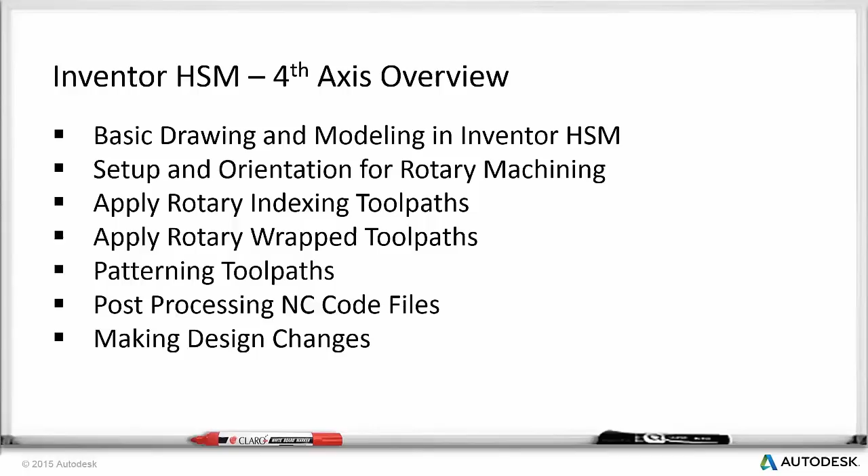We're going to show you how to pattern those toolpaths around the part, post-process, and get some code out so I can show you how it's rotating around the part. And then we're going to make a design change and see how it's completely integrated inside of our CAD and our CAM. We're going to walk through that easy-to-use interface.

This is the part we're going to look at. It's a torsion adapter for a vacuum cleaner, and we'll draw it up from scratch. Then we're going to put some toolpaths on it: put some rotary axis, put some drills on there, and then do some of the new wrap toolpaths.

So let's get started. We're starting from scratch today, so I'm going to walk through. I want to create a brand new project to start working with. This is the Inventor project that I usually work with when we do a lot of our demos and training. I'm going to go in and create a brand new project from scratch.

I'm going to go to Projects, New. It's a single user project, but if you have other users that you're working with, you can make a Vault project as well using our Vault. So I'm going to give it a project name. We're going to call it our 4-axis rotary.

And then I'm going to point to a folder on my computer where I want data to go and stay in that folder. On my desktop, I created one called 4th axis rotary. We'll open that up, and that's where it's going to save the parts. Okay, I'm going to go to Finish. Now I have a new project to work on.

I'm done. And now in my new project, I have no files yet, so we're going to start from scratch, a brand new file. So I'm going to go to New. We're going to start a new standard part and create it.

And so I like to work on the plane that's normal to the Z. So I'm going to start my rotary part going around the x-axis. That's going to be my a-axis rotation. So I'm going to draw in the XY plane today.

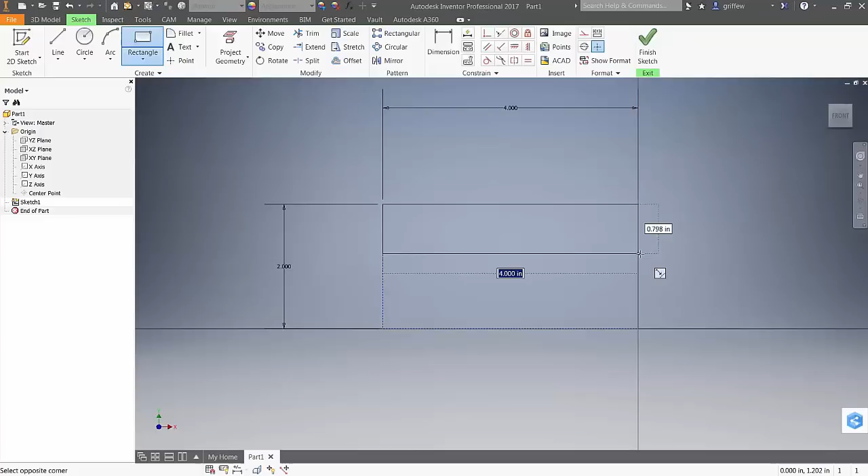So I'm going to choose another rectangle. I'm going to start in this corner where it snaps and it turns green, and I'm going to have it snap. If I hover over that line, you notice the constraint - it recognizes when that line is connecting to the dotted line or the construction line. So all I have to do is now define the thickness of the wall of my tube, because I'm going to rotate this around the X. So I'm going to choose a dimension, and I want this to be 3/8.

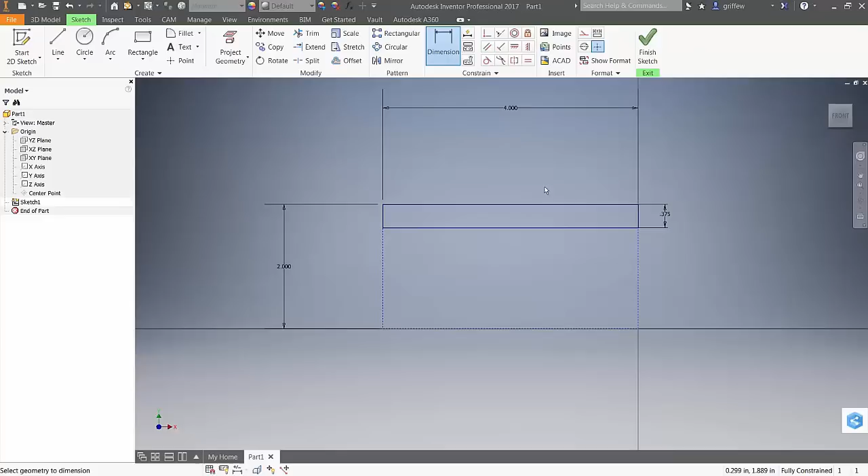So now I'm set up to rotate this part or wrap it around the X and have it as a revolve. So I'm going to finish that sketch. Now I want to revolve that profile, so I'm going to go up to Revolve. It recognizes the profile. All I have to do is select the axis of rotation. So now I have a revolved part.

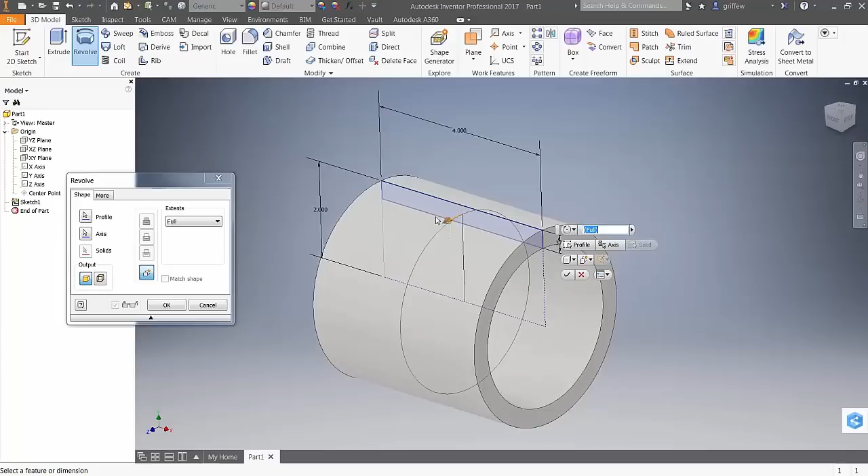It's a tube that I'm looking for, the shape of the design, and it's also around that x-axis. So I'm designing the part so that it is going to work when I go to bring it in and be able to revolve it around that axis. So inherent in my design, I'm setting it up so it'll work well when I go to do my toolpaths and I go to work on it in CAM.

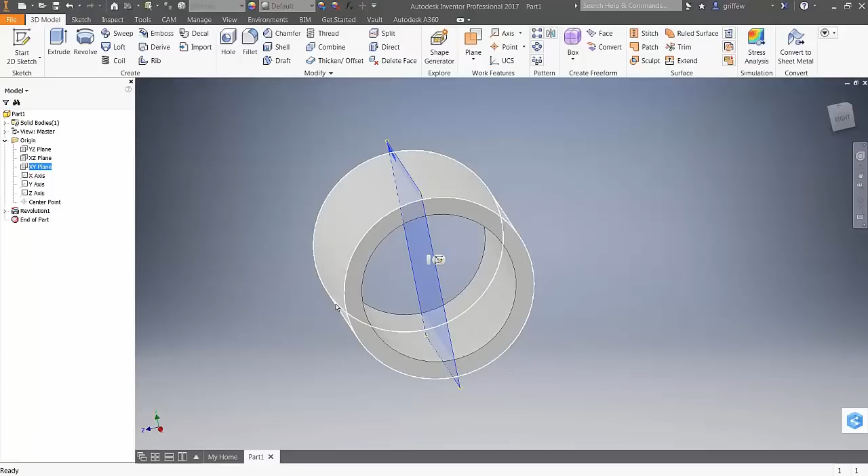Okay, so I'm going to have some features on here. This is the front of the part, and later on I'm going to consider it the top. So I want some features on that front plane, which is my XY plane. But I also want to put features where it intersects with the front and back of the part. So I'm going to add some offset planes. I'm going to go to plane, offset. I'm going to offset from this plane 2 inches, and offset a plane in the front that I can put some features on.

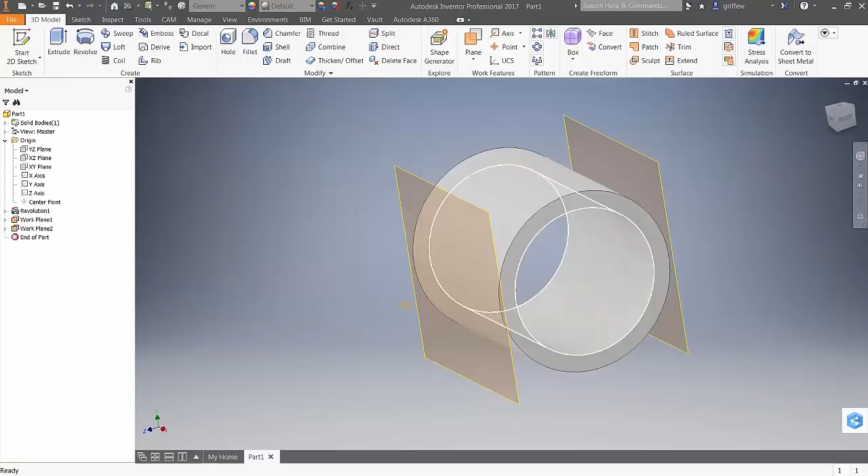I'm going to do the same thing. I'm going to select that same plane, offset from that plane, and go -2 inches. So now I have some planes that I can work 2D geometry on, which I can now project, or I'm going to emboss them, if you will, and engrave them onto the side of the part. So we don't need to see them right now. I can always select them later. So I'm going to highlight them while holding Control, right-click, and hit Visibility. Now I can hide them so they don't get in the way of what I'm working on.

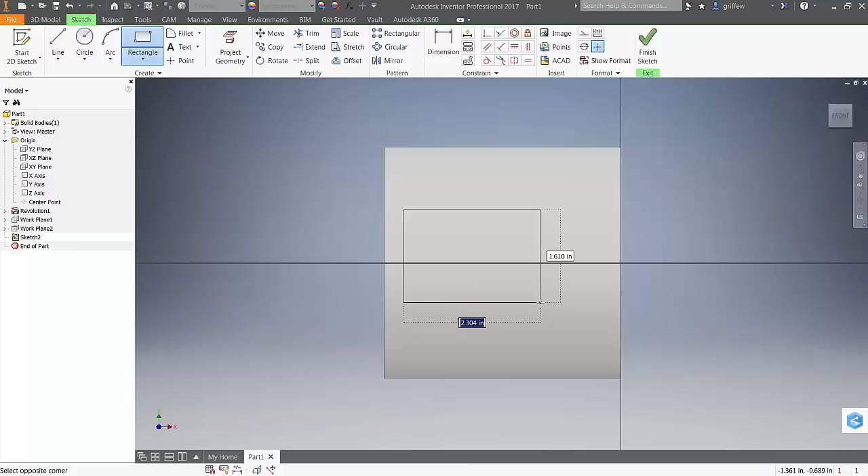All right, so I am going to do a sketch on that front plane, so I'm just going to simply select the work plane and then select New Sketch. I'm going to go into the front plane here, and I'm going to just simply put a rectangle in here. I'm going to start it from scratch. I'm not even going to put any dimensions - you can add dimensions here, I just want to show you can do this. If I just put a rectangle in space here, I can move it and stretch it, and add other constraints onto that rectangle.

Right, so I'm going to add some fillets around here. Let's go and add some fillets. Right in the corner, I'm going to say we'll put a 1/4 inch fillet in that corner. So if I hover over the corner, I get a preview of what that fillet will look like. All I have to do is click the corner, and I get those fillets on there.

Okay, so now I'm going to add some dimensions after the fact. I want this to be 2 inches. And I want this to be the width. I'll make this 2.5 inches.

And what I didn't do is I didn't project my point in here, so I could do that right now. I'm going to go to the center point, project it in, and now I can measure from that center point. The reason I'm doing this, I can also project any of this profile geometry, but often when I work, I like to add features that I can turn off and on later when I'm doing CAM or other operations. If you add a profile, or project those features in, they're now linked, so if you turn off something in the past, it'll turn off another feature in the future that depends upon it. So I like to work independently.

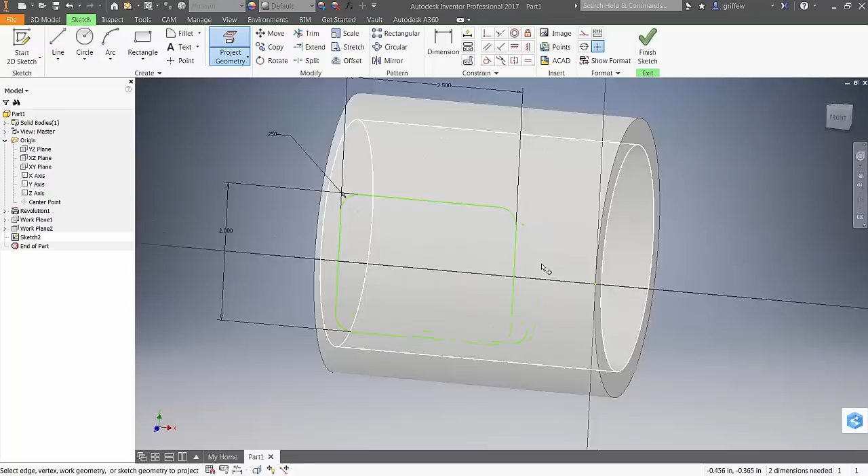So I want this dimension to be from the center point or the origin. I'm going to put another dimension from this origin to that line there, and make that 1.25 inches, or 1 inch and 1/8. Let's make it 1 1/4 inches. Okay, so now we're constrained, except now I have a dimension, or shall I say I can move this thing up and down in this plane.

Now what I want to do is add a construction line down the center, and I'll show you we can add some symmetry. I'll make that 4 inches. Now I want that to be symmetric about the center line. I already added that center line, so I'm going to make that become construction geometry, and now I want to add symmetry.

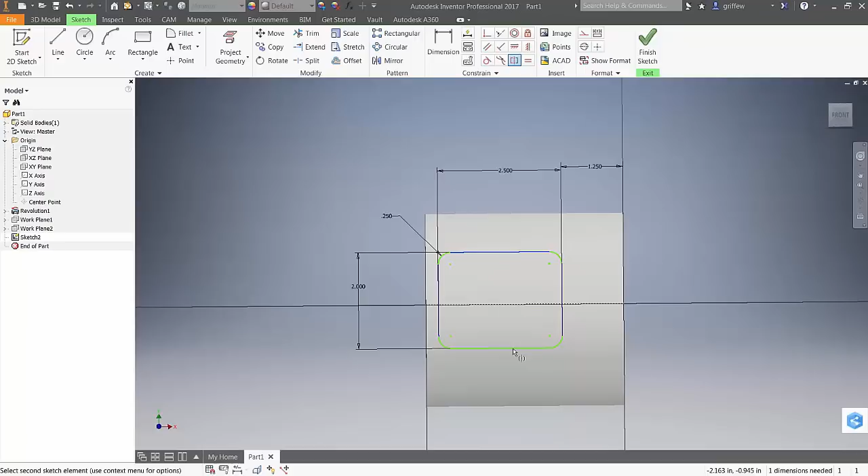So I click symmetry, and down here in the corner it says select the first sketch element. We'll choose the top line there. Then it says select the second element. Now it says select the symmetry line, which is that center line. And now I have a symmetric constraint.

So as I change this, I'll make it 1 inch. You'll see it'll stretch from the center out. So that's a way to add constraints as you're working on your design.

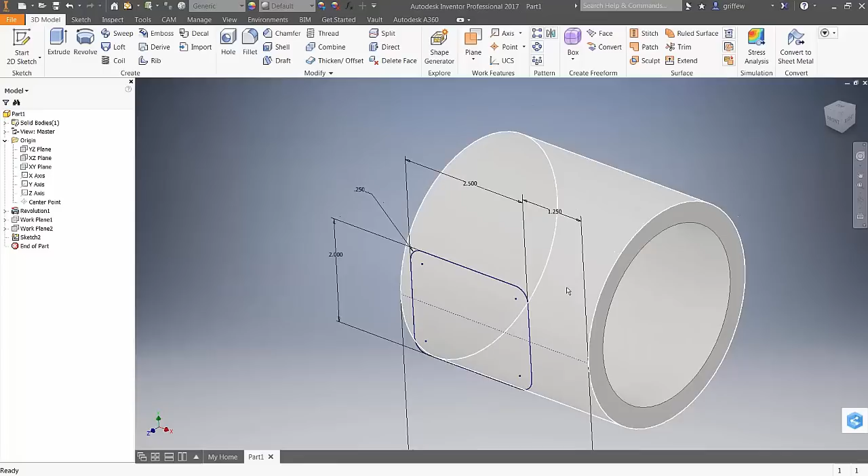Okay, so now I want to get this projected, not as a cut through. I don't want to cut it through. I want it to wrap into the cylinder, cut through as a wrap around the cylinder. Now, there's no direct project for wrap, but what I do is this: I go to Emboss. This is the Emboss tool.

You can use this to engrave too. It can be text in different shapes and different types of geometry. In this case, it's just this box, this pocket, so I chose to engrave it. I can give it a depth, and I know my wall thickness is 3/8, so I'm going to go 0.375, and I can tell it right here, wrap to face.

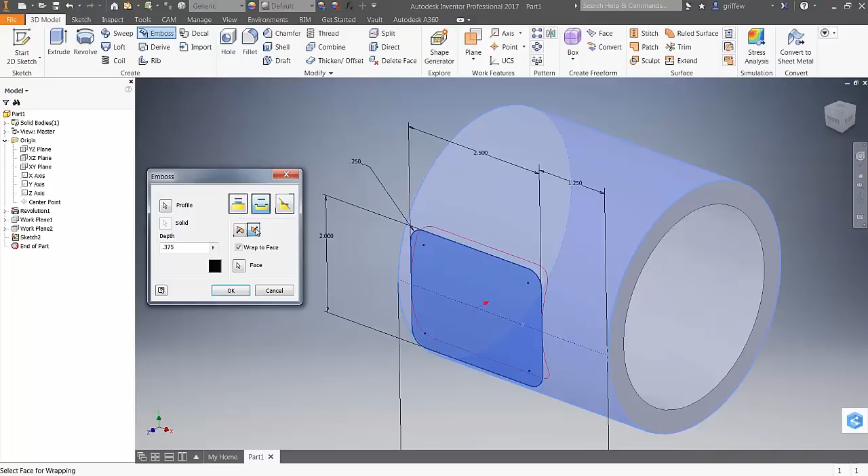So now we can wrap that geometry right to that face. It projected through because it's looking at the direction I want that to wrap, the direction to cut through. I simply flip the direction, and now I'm cutting it and wrapping it through the part as if I'm going to engrave it. Say OK, and now we have a pocket through the part that's wrapped around that cylinder.

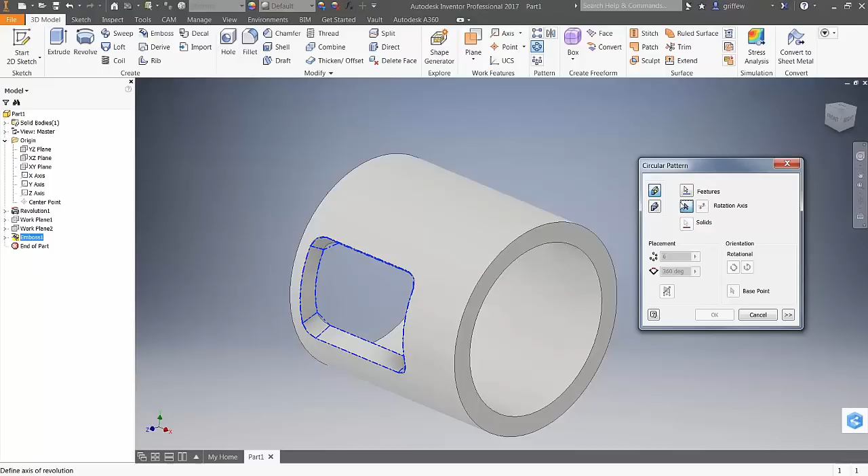So now I'd like to have 5 of those go around the cylinder, so I'm going to highlight the emboss feature I just created, go up here and select circular pattern, and bring it over. So I'm going to do a circular pattern around. It wants to know my center rotation axis, so I can just simply select one of these cylinders, the central one, and I want to make 5 of them. So now I'm going to wrap 5 of those pockets around the part. I'll say OK, and now I have those pockets wrapped around.

Okay, so now I want to add some hole features on the back side, because the front side is the center of the pocket. The back side is going to be this rim right here, and I'm going to put some hole features on there. So I'm going to flip it around, my Z is going the other way, and I'm going to use this work plane 2 that I created to put some holes here. So I'm going to edit on that work plane sketch.

I'm just going to put a line across here, and I want to put some points going across that line. So I'm going to create a line. I forgot to project my center point. There we go, I'm going to create a line, and we'll make that 4 too.

Now I want to be able to have that line, a point on this line. It doesn't matter if this is construction or not. I'm just going to put a point in that line in space. Okay, now if I drag that line or that point, it stays along that line.

Now I'm going to add a dimension to it, because I'm going to make a pattern of 5 of these. There we go, I made it an 1/8 of an inch, or an inch and a 1/4 inch. And now I'm going to add a pattern of 5 of those points, and those are going to be the center points for my holes.

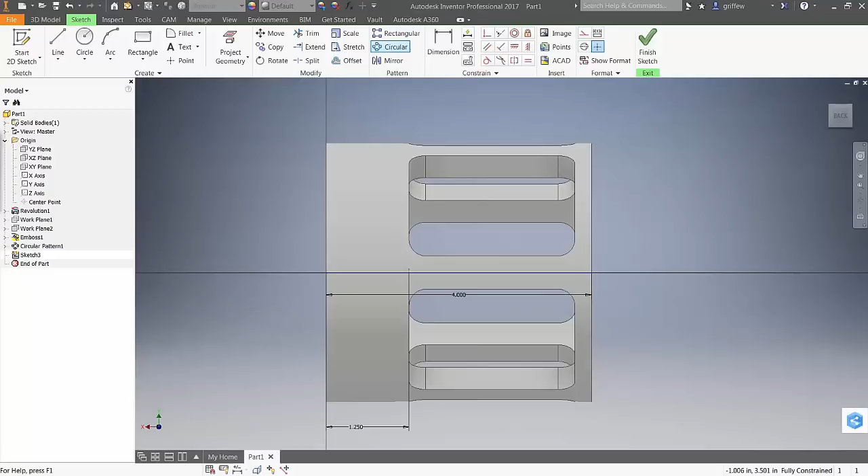So I'm going to go up to do pattern. That's circular, I'm going to change this to a rectangular pattern. I'm going to select that point, choose the direction I want it to go, select this direction, and I want to make 5 of them. So I select 5 and then give it a distance. I'm going to say 5/8 — you can even use fractions in here, and it works out nicely.

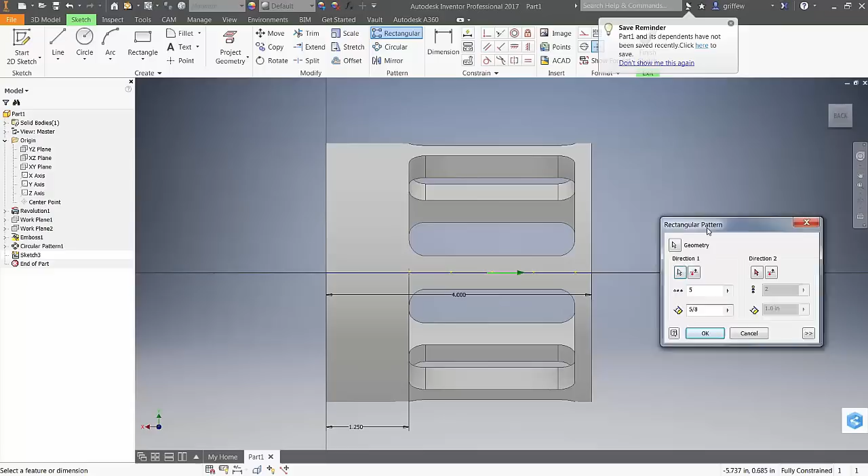So now I have 5 holes. I'm going to select OK — at least 5 positions for those holes where I want them to go. Finish that sketch. Now I'm going to highlight the sketch, go up to add a hole, and it recognizes those points on the sketch as places where I want to put holes.

These are 1/4 inch, I don't have to change that. I want them to be 1/4 inch holes, but I don't want them to go all the way through — I want them to be 1/4 inch deep. Now you can add threads, you can add a tapped hole, you can add other features to it. It's going to put the drill point in, but these holes don't have any taps, so I'm going to leave them the way they are.

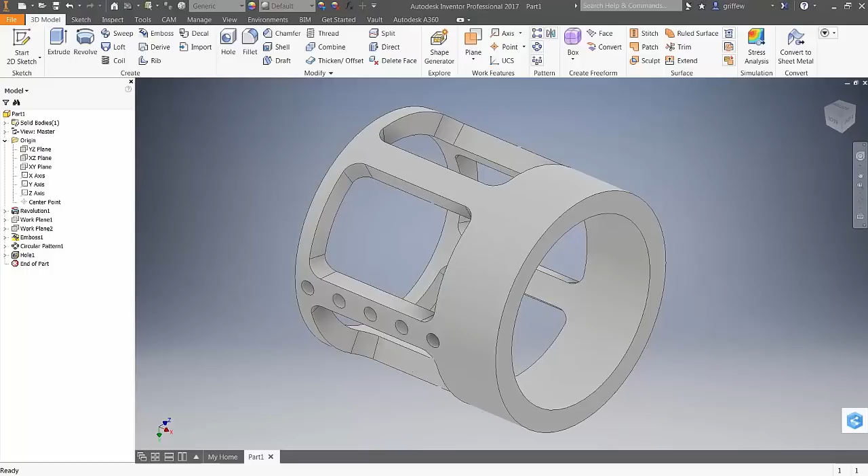And now I have a set of holes. So all I did was create a sketch on that plane that's adjacent to the face of the part, and I added points and just selected hole. Again, I can pattern those around. So if I select the hole, go up to circular pattern, it wants to know what's the center of my axis of revolution. I'm going to choose 5, and now I have those holes in that plane, each of those planes. So later on, we're going to index around to drill those holes.

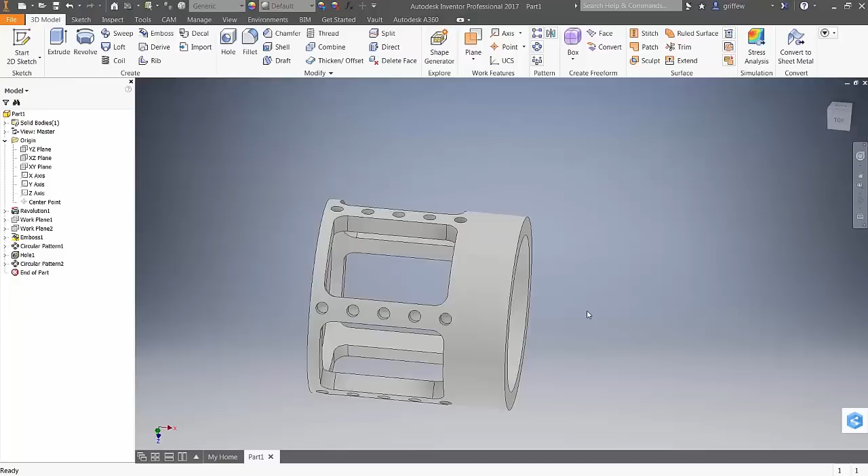I have one more feature, these little fingers, or these slots that are in here. So I'm going to select my work plane — we can work off my work plane too — and I'm going to create a sketch on that work plane too, and create a slot right here. I'm going to go in and project in my center point, create a slot.

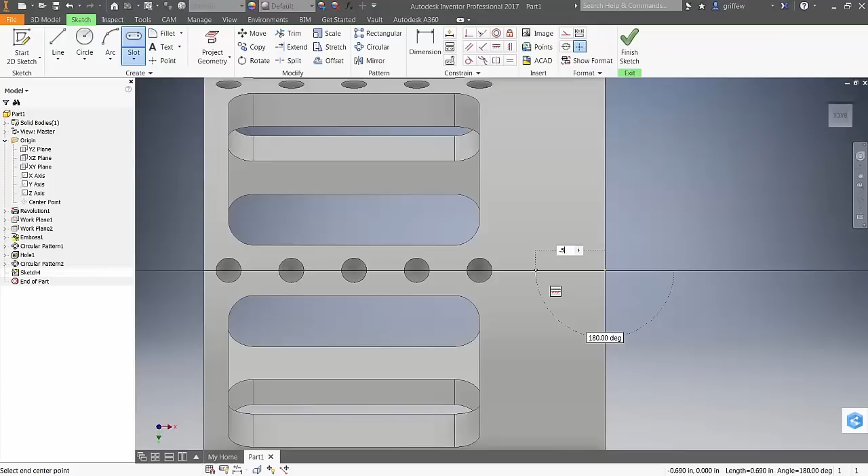And it's okay, I'm going to make it a 1/2 inch slot, and my diameter is going to be — my slot hole is going to be a 1/2 inch. It's okay if it hangs off because it's going to be an open slot. This is one quick way to be able to get that feature.

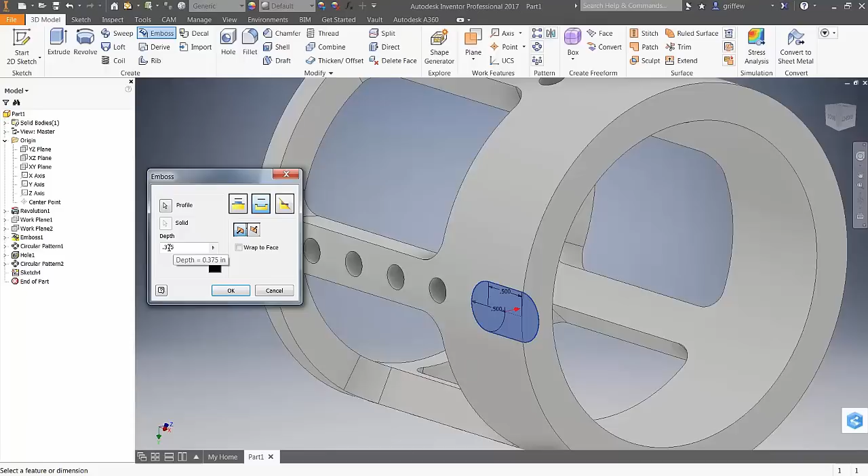Again, the same way we did it before, I'm going to emboss it. We want to do the engrave. If you remember the last depth that we used, if I change the projection, it'll project to the other side. I want to wrap it to this face and then say OK. And now I have that wrapped slot feature.

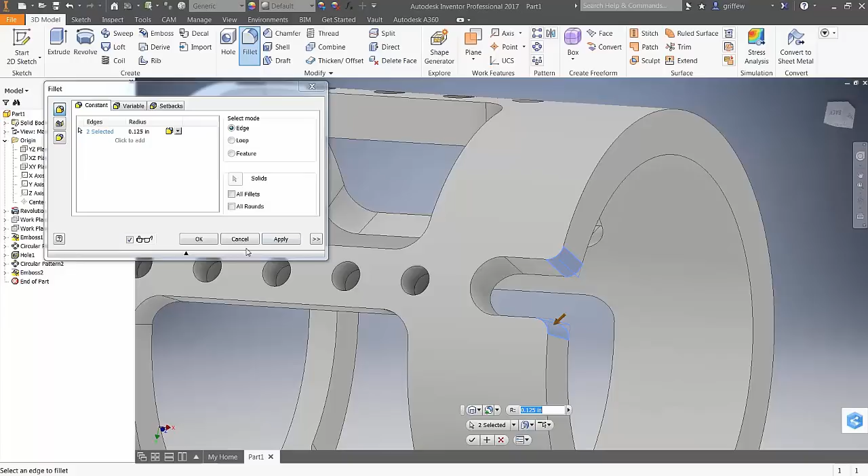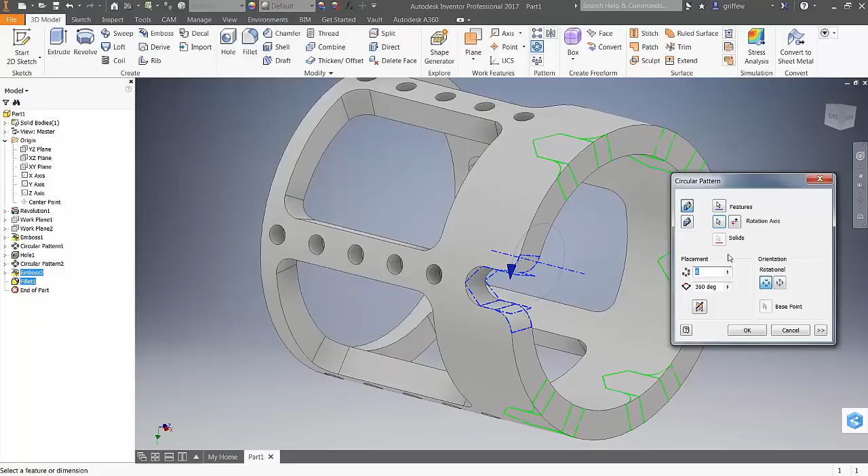I'm going to add a radius on the corner here, go into my fillet, grab this edge, grab this edge, and we'll make it a 1/8 inch. Now I want to make a pattern of those features that go around — there's 8 of them. So I'm going to grab and hold Control, get the fillet and the emboss, and make a pattern going around that feature. It wants to know what's the rotation axis because it's highlighted blue. The next thing is how many do I want — 8. Okay, and now I have those features, those finger features.

So that's the part we're going to make. We're going to set it up to be able to make this on the machine, on our rotary axis table or A-axis table. I'm going to save it before we do, so I'm going to go up to Save. It knows the project because we set up the project, and it knows where to save the file. I'm just going to call this one my torsion adapter.

Save it. I'm just going to jump in for a minute here, Wayne, and say this is the first webinar, I think, where we've gone through how to model a part. I'm seeing some great feedback from users that they like watching you do that, and I think it's great.

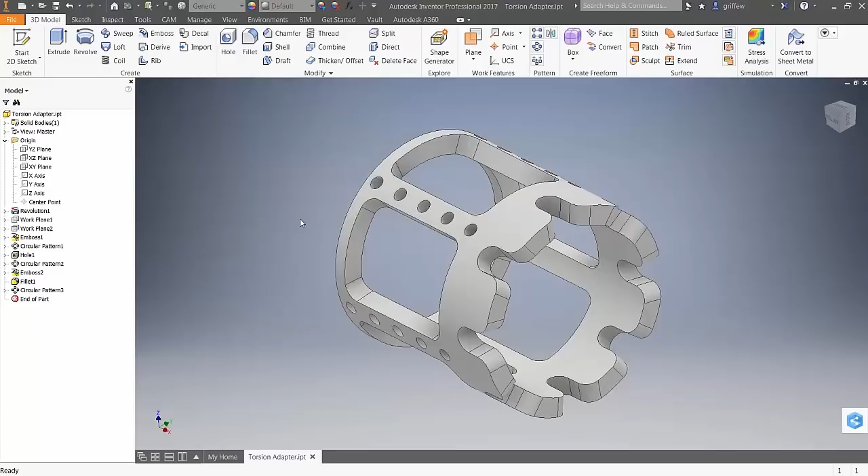Awesome, will do. Especially when it comes to these new toolpaths that we're seeing from our development team, who are able to now get some awesome stuff, awesome algorithms working with wrapped toolpaths. So I think the question will come up a lot more as to how to make geometry that's wrapped around a cylinder like this so we can get those toolpaths on. That's mainly why we're walking through this process today. I have to be careful, but I'm talking to the right audience now. I often say you can be a CAD guy without being a CAM guy, or a CAD operator without being a CAM operator, but it's pretty impossible to be a CAM person without having a strong understanding of the CAD application. So glad to see that there's more people wanting more of these tips. Again, sorry for the interruption, but that was a good thing to bring. No, thanks, Al. I totally agree.

Awesome. Okay, so let's set up now. We're done with the CAD part of it, and let's go into the CAM to be able to get some toolpaths on this part. So I'm going to switch over because we're using Inventor HSM, the plugin for Inventor. When we switch over to the CAM tab, we get the ribbon bar that has the CAM toolpaths and the setup and all the things we need to be able to work with CAM.

We're also going to see on here, when I start to do a setup, the browser is going to change to show us some CAM features in the history. So that's the first thing I want to do. And the important step, especially when you're setting up for a rotary axis, is to do your setup the right way. So the first thing I'm going to do is click up here on my setup. You have that in-context help when you need it—the manual's there whenever you need it.

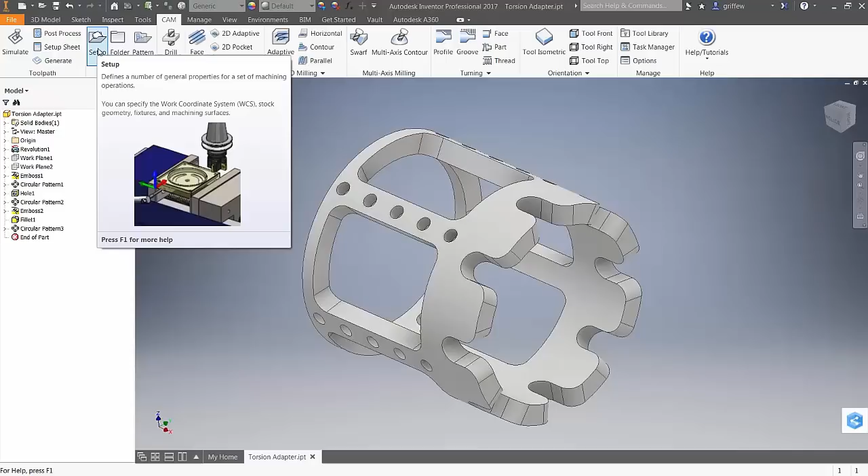So I select Setup. I'm going to stretch this over a little bit—I'll lose a little bit on the graphics, but I'll be able to see more of those tools over here. Initially I select Setup, and it recognizes that I want to either do turning, mill turn, or milling. In this case I'm going to do milling, but you can do both in this interface. You can work the same exact workflow as you're working in milling, you can do in turning as well. So in this case we're going to switch it to milling.

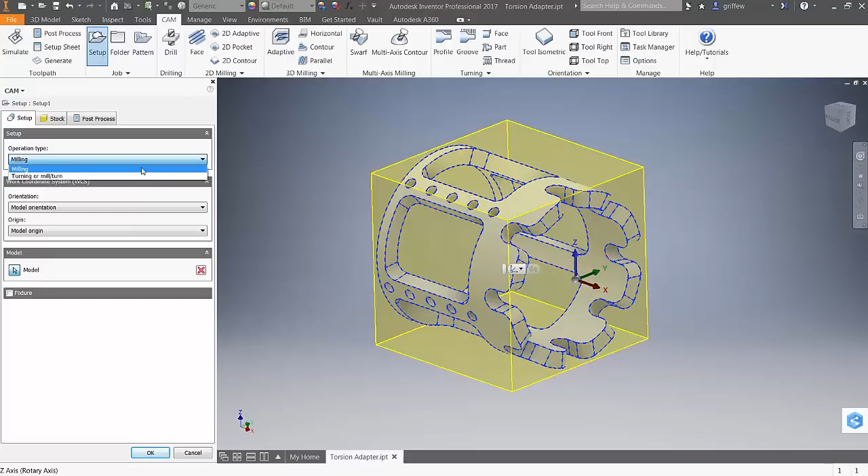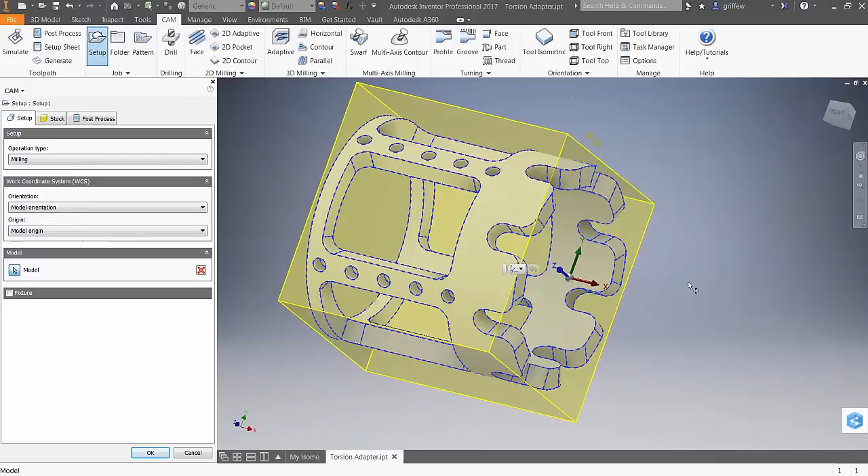It recognized the Z is up and my X direction, and that's the direction we want to rotate around. It's not often going to be that case, but we set up this part and drew it in such a way that that will happen. But that's the idea, to always have your part, if you're going to do rotary axis around the A-axis, make

sure the X-axis is the center of the cylindrical shape of your part. So the first thing I want to do is go into my stock and set it up as a cylindrical tube. I can go into relative size, down here, a relative or fixed size tube. I'm going to use relative size tube, and it recognizes almost as soon as I choose the center axis, it'll recognize the boundary of the inside and the outside, the OD and the ID. So I can add some radial offset. In this case, I'm going to leave it at 0.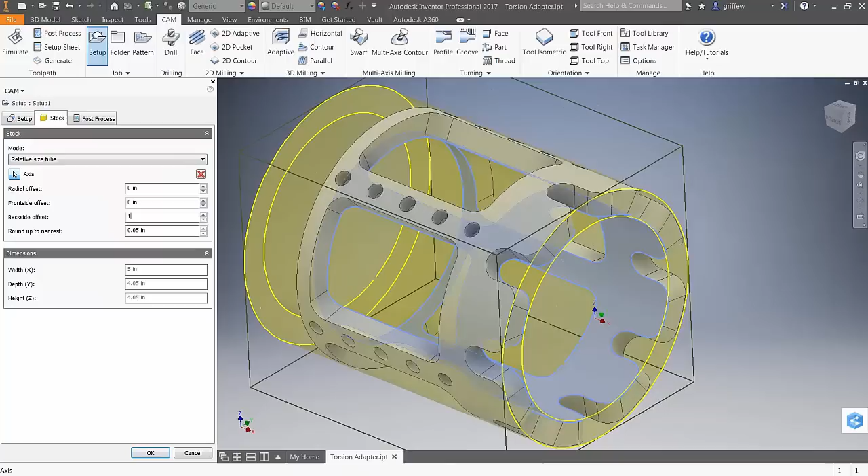For this webinar, we're going to leave it at that shape. But normally, I would like to leave some on the back here, so you can do a backside offset. Let's say we even do that, say 1 inch, so we can hold it into our chuck there. I probably would add 1 inch. But that's just to show you can do this in this interface.

So my setup is looking pretty good. My Z is pointing up sort of in the middle of that pocket right there. And I can show you, I can reorient that Z. Let's say we want to set this part up in a way where our Z is going to be pointing up normal to those holes. So the first thing I want to do is drill those holes in the Z so I have 0 rotation.

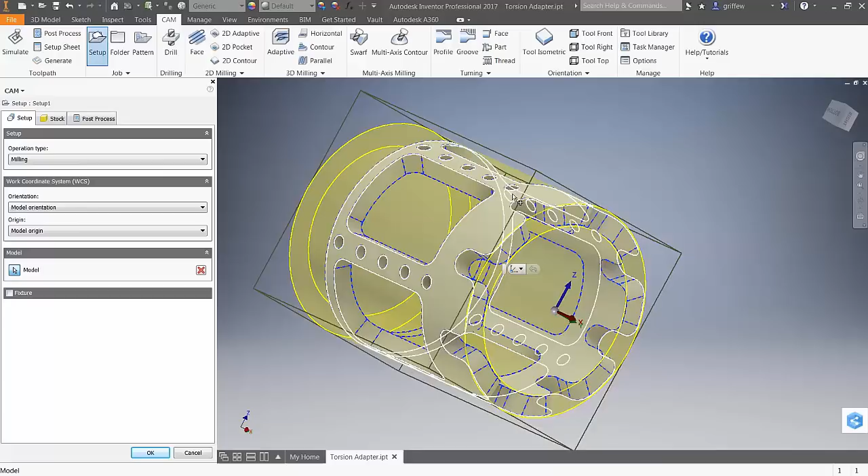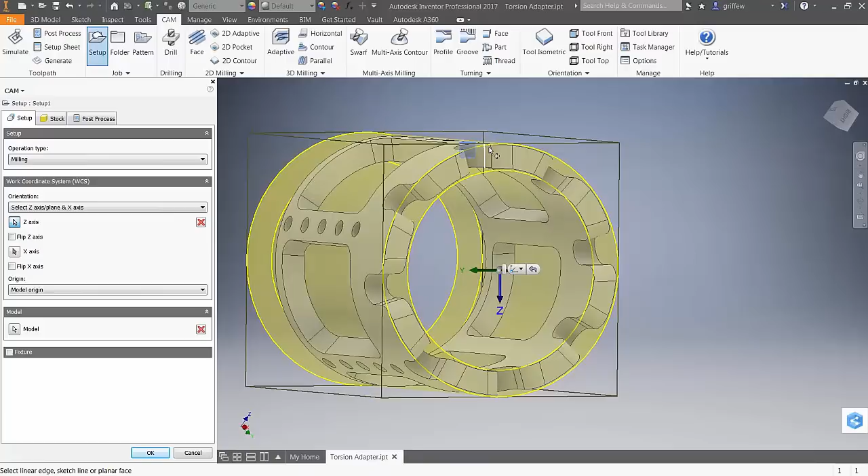What I can do is select my Z axis. You can do it this way, or you can simply select the shaft of the Z and then select a feature like that hole. It'll flip it. It recognizes the hole vector and flipped it over. What we need to do is just flip the Z axis like this. And now we're aligned with the center of that hole. That's one way you can align it with a feature of your model to have it aligned the way you set it up in the machine.

So the first thing I want to do is drill these holes on top. I'm going to go up to the drill toolpath. And I forget what the size of that hole is, so if I hover over, I have a short-term memory here, but if I hover over, you see down here in the corner, it'll give us feedback over whatever hole it is that we're hovered over. Even arcs that are in the same plane, you can see those as well. So this is a 1/4 inch.

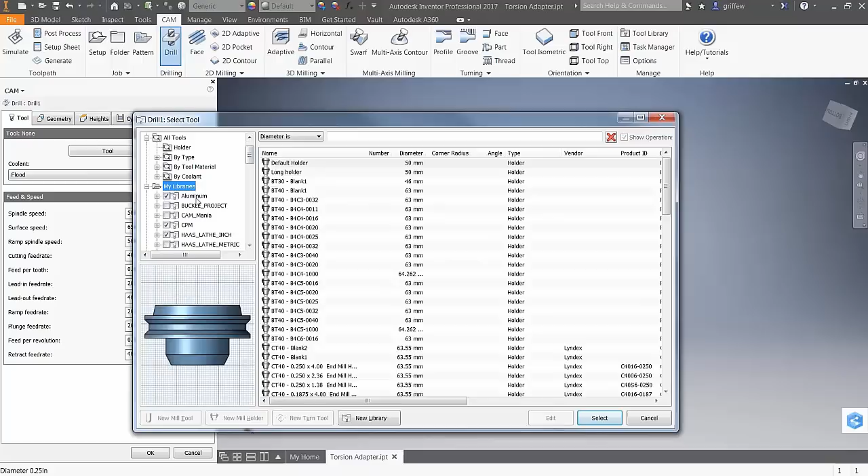So I'm going to select the 1/4 inch tool out of my library. In this case, it's a brand new part. I have some libraries that I set up, and I highly recommend setting up a tool library that matches either your machine, what you have in your pockets, or in your tool crib. In this case, I have a bunch of aluminum tools, and I have some steel tools in the library. It's easy, just right-click, create a new library, and you can start creating new tools, or you can copy them from our sample library. The sample library comes with a lot of good tools to get started with.

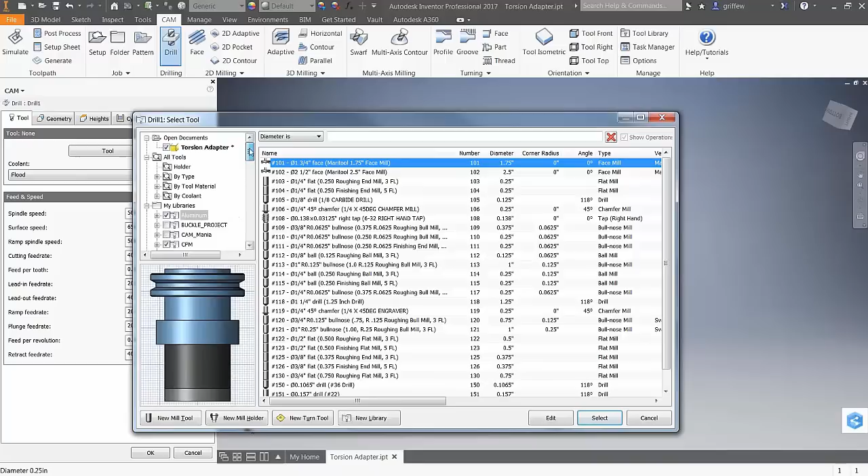In this case, I'm cutting aluminum, so I'm going to choose aluminum. I don't know if I have a 1/4 inch drill, and that's okay. If I don't have one set up, I can set one up. I'm just going to simply search by type. I'm going to search by drill, and I'm going to filter on the diameter, which is a 1/4 inch. And now it filters on tools in my various libraries that I can choose and work with. Let's select this 1/4 inch drill right here.

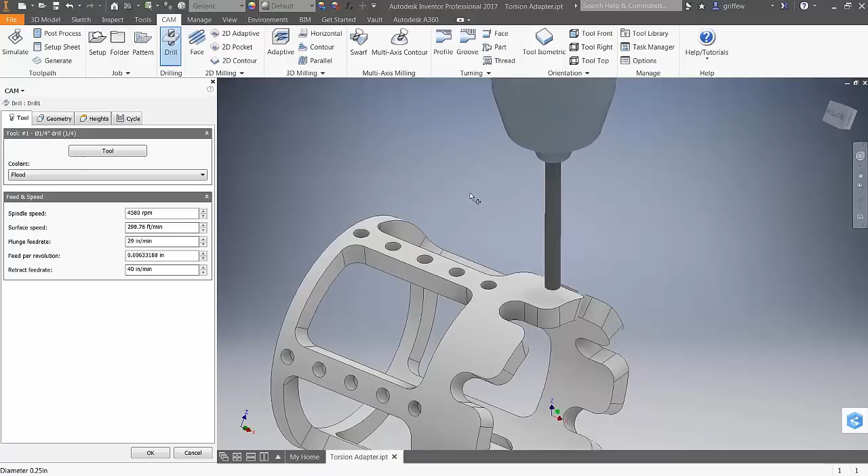Brings in the feeds and speeds of that drill. Wow. And so the next step is to select my geometry.

Now I want to select the hole faces. That's the first thing that's lit up blue here. So I'm going to select this hole face.

Because it's in the same plane as my Z, I don't have to choose any rotation. We'll talk about that in a minute. So I'm in that plane, I'm going to be able to select the same diameter of any holes that are in the same plane. But notice it didn't select the diameter of any of these other holes, because they're not in that same plane right now, XY with the Z up.

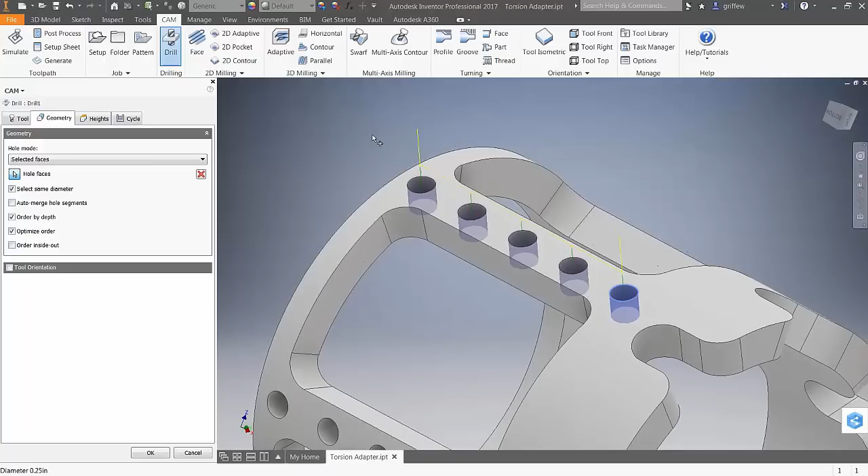So Wayne, can I jump in for a second here? There's a bit of a question in regards to work offset setting versus a tool orientation. I'm going to answer the question at a high level.

If I get it wrong, Roger's asking the question, just go ahead and clarify. So the work offset setting in the setup is defining where Z is going to be pointing, what the orientation is when you set up your machine, when you initially set your work coordinate system. Tool orientation is used when you want to program the machine to rotate to a different orientation. So we use tool orientation to program the machine to reorientate the machine. It's what we call 3+2 programming, reposition that axis.

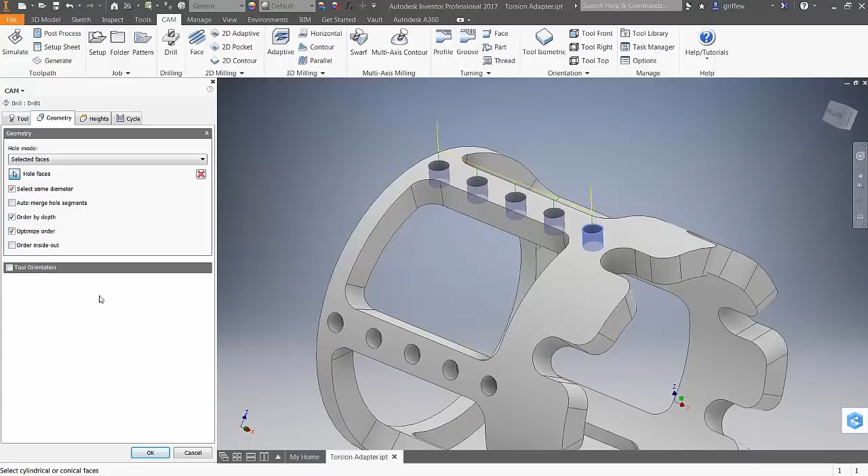But the WCS is set up to define the initial orientation. Just as an aside, if there's new users, some people end up caught in this trap where what's a strength of the software ends up being a weakness. That is, if you create a toolpath without any setup yet, we're automatically going to create the setup and pick what we think is the correct direction for which direction Z goes in. And then we found some new users are then using tool orientation to rotate the Z.

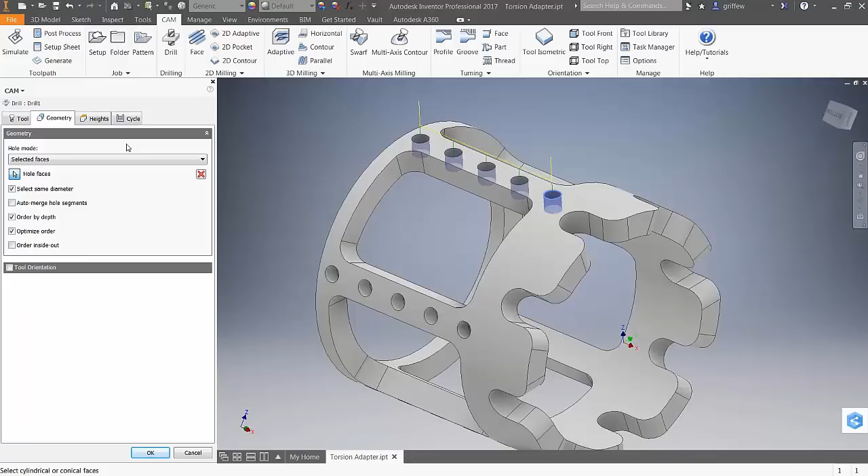So as a reminder, the setup is defining how the machine is set up. The tool orientation is programming the machine to rotate from that initial setup to a new orientation. We're looking to update some of the documentation to help people with that, but I don't know if that was the question. I think now is a good time to bring that up.

So again, the work offset in the setup is going to define how that setup is set up when you initially put the part in your machine. Sometimes it's going to be wrong if you create a tool path and we automatically create your setup for you. Tool orientation is used to program a fourth or fifth axis to rotate the machine to that new orientation. Hopefully that helps your question, Roger. If there's more to it, feel free to ask the question.

Sorry to distract you in the middle of your flow there, Wayne, but it felt like a good time to answer that question. No problem, Al. That's actually a really good point.

I often like to think of it this way. As Al had mentioned, this setup is really matching the way it is initially set up in your machine. So if the Z is up, the X and the Y are set in this position, that's the way it's sitting in the machine.

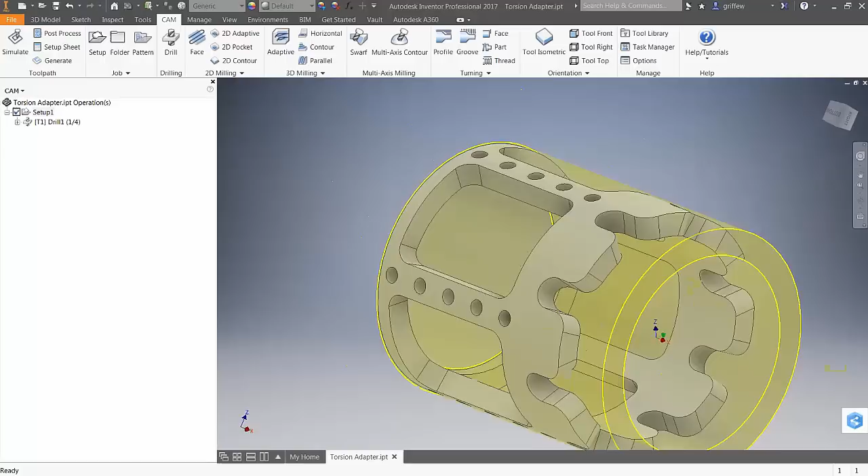I often like to think of it this way. If I'm going to manually take this out of the machine, rotate it, and put it back in, then I would do a new setup with that new orientation. So that's a manual operation of reorienting your part, taking it out, putting it back in. You would use a new setup because then it won't give you any rotation. It's going to be a new WCS, if you will.

When you're in one setup and you do a drill setup like this, and we're going to do this in a second, I'll show you. If I want rotation called when I post, I want to do it in the same setup. That's when I'm going to use tool orientation, because I'm going to reorient the part to the tool to get that rotary call, so that it knows that I'm doing drills on these holes.

Then I'm going to rotate it again, so I'm not doing that manually. I'm having the machine do it, and I would do it in one setup. But the initial setup, as Al had mentioned, is the way it's initially set up in the machine. And then we're going to now put toolpaths, which will now manipulate it as the machine's running.

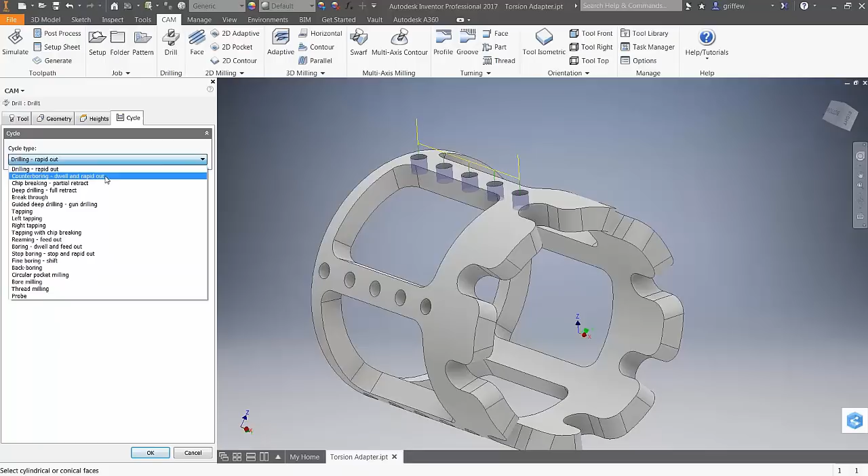So in this case, we have this drill set up. Let me go back in and show you. I selected that geometry, just a few more steps. The heights are going to leave out of the box, but they have different cycles you can run - drilling, chip breaking, counter boring, tapping cycles, boring cycles. I'm going to leave it at drilling, but I just want to show you in the cycle tab, that's where you can set that.

Now, I won't have any rotation out of here when we post out the code. We can take a look at that in a minute, but it's just going to stay on the Z top, and it's going to come in and drill those.

Now, what I want to do is I want my rotary table, my machine, to rotate it around to have those tools or those holes now presented to the tool. I'm not going to physically move it, I want it rotated in the machine. So that's where I would do it here - I'm going to add a new drill cycle.

Notice it's still oriented from that last initial orientation. So if I go into my geometry, now I want to do tool orientation. I'm going to change that Z - see, it's highlighted Z - I'm going to rotate that Z. In other words, I'm going to rotate the part around.

To be normal to this hole. It flips the Z because it sees the vector going this way, so I just simply need to go over here and flip the Z axis. Now I have the Z normal to that hole. This is where tool orientation comes in, because that's going to give your rotary call to move to this position. So I don't have to do a new setup at all.

So now in the same case, we're in the same plane, I can select the same diameter. And now it should grab - oh sorry, I only selected that as my plane, I didn't select the hole yet. So I'm going to select the hole faces, this hole, and then apply select the same diameter. I'm going to hit OK.

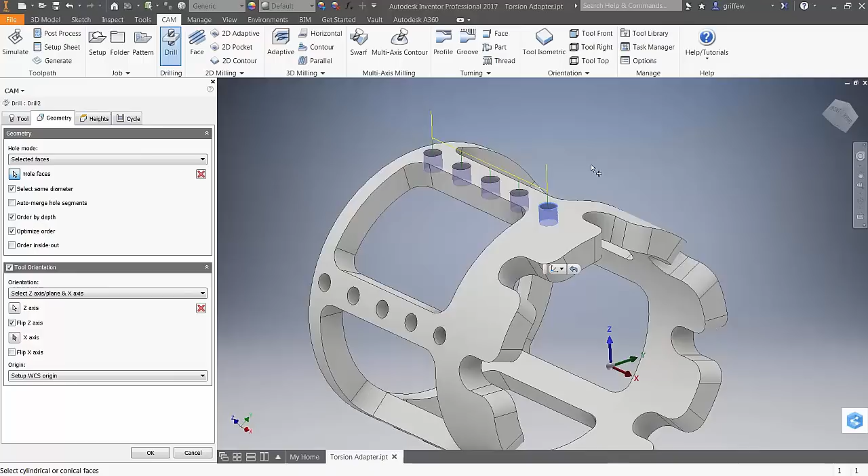And you'll see on this drill tool path, we're oriented like this. And on this tool path, it's going to rotate around in my rotary around the X or around the A, and it's going to give us this tool path.

So we can do this in setup. If I highlight setup, I'm going to simulate, and it'll show us the tool moving, and it won't have the part rotate around, but it'll show us the tool where we're drilling those holes.

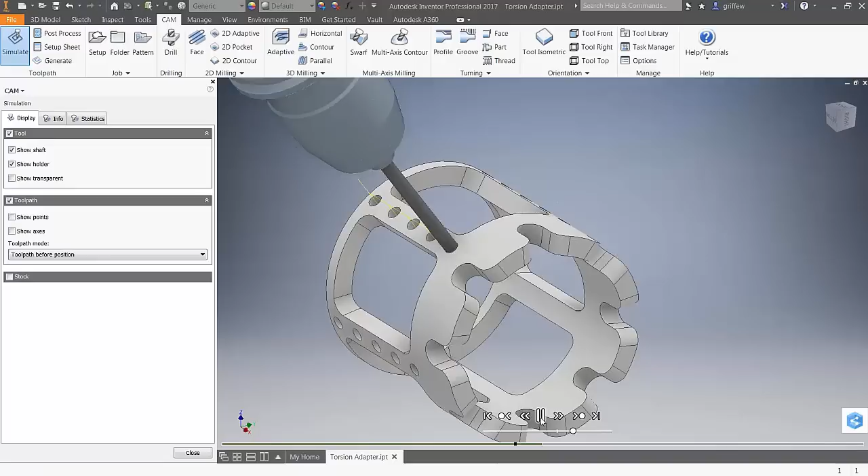The part rotates around, and we're going to drill these holes now. That's how we get indexing, by using that tool orientation in the toolpath.

So if I post out this code, I'm going to go up to setup, and we'll post real quick just to show you. I'm going to use the Haas with A-axis, works well with the rotary table. Post out that code, overwrite what I had before, and now we have the lock codes, 0 rotation.

It's going to offset, it's going to come down and do this G81, run that cycle on those holes. Then down here we see on drill 2, it unlocks, rotates A72 degrees, locks again, and it does the drill cycle on those additional holes. And then down here it returns back home to A0.

So we get rotary code that we can send to the machine to rotate that drill cycle around.

Maybe just a quick introduction or point - you may bring up post later. There is a requirement for some post customization, some posts have more flexibility than others. A lot of people said they had Haas - we have a default Haas A-axis post. That does assume that the A-axis is on the right-hand side of the table. If your A-axis is on the left-hand side of the table, you need to rotate negatively around the X-axis. So just keep in mind it does take some post customization.

I think some people said they're using Tormach. There was actually an update recently to the Tormach post - it does support you defining the axis and the direction within the configuration of the post. So just keep that in mind. If there's any questions, the forum is a great place to go get answers. I see Seth, who's on the webinar today - you might even get an answer from him, one of our users, or some of our guys. But keep in mind to leverage a fourth axis probably would take a little bit of post customization just to define where your axis is set up.

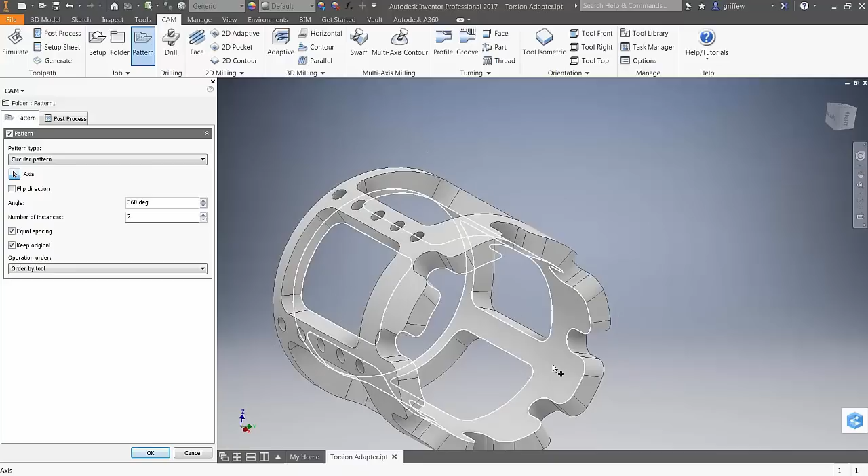Instead of a linear pattern, I'm going to do a circular pattern. It wants to know the axis of rotation. I'm going to select that inside face, that inside rotary face. And I'm going to do it 5 times.

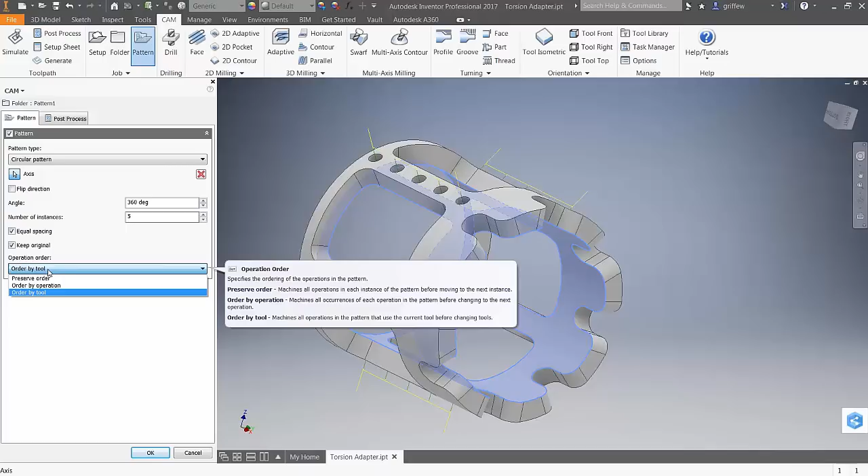You can plug in that number according to the number of holes or hole positions you have there. You can also do order by tool. Later on, we're going to look at other toolpaths where we do a tool change. You can have it order by tool so it does all of that tool first before it rotates, or you can do it order by operation, so all those operations are done with the tool changes before it rotates around.

In this case, I'll just leave it on order by tool, select OK, and now we have this circular pattern. It's going to work its way and call up the rotation for each of those positions to index around. We get back up to Z. And again, we can look at this pattern and post out that code.

I'm going to do it really quick. As Al had mentioned, this is the one post, the Haas A-axis. Oops, I didn't hit post. We'll see it update and give us each of those positions of rotation here.

So that's indexing. You can, of course, do the indexing and patterning with toolpaths. You can do this with all of our adaptive, pocket, and contour.

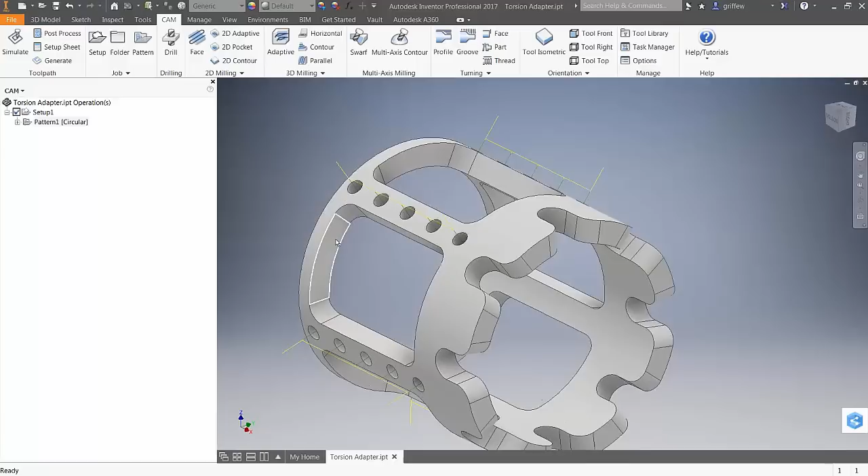Before I go in to do those, let's actually do it. Let's go through, and I want to show you what has been added into our HSM. It's in Fusion as well, that you can go into our adaptive, our 2D pocket and 2D contour, and you can do a wrapped toolpath.

So I'm going to start off with this pocket right in here, and I'm going to do a wrapped toolpath inside that pocket. So I'm going to do a 2D adaptive, working from left to right, that same easy to use workflow.

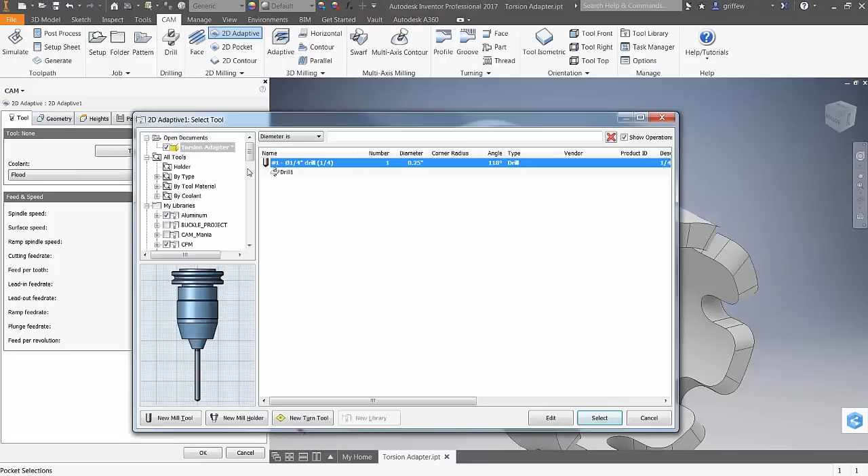Select a tool. I'm going to select out of my library, my aluminum. I'll grab my 1/4 inch flat end mill. I'll probably do something bigger, but I'm going to do the 1/4 inch for this webinar. And now I'm going to go into geometry.

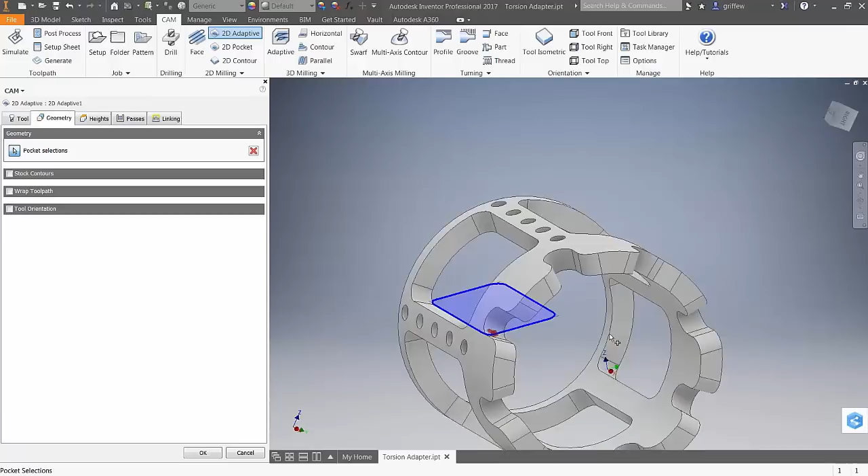There's a function down here, wrap toolpath, and I just want to show you. I'm going to select this pocket edge right here, right down here. When I do, it wants to project it into the XY plane. It's not really wrapping anything until I turn on wrap toolpath, and now you'll see it project. Right now it's got a red line, dotted line, because it doesn't know the cylinder we want to wrap around, or at least the radius of it.

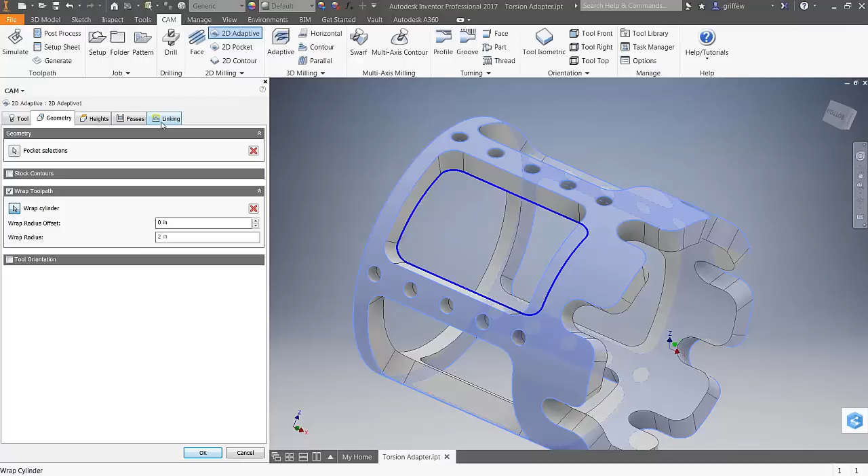So that's what I want to select. I'll select this outside face, and now you can see the geometry is wrapped, where it's selected that area that's wrapped. And now we can apply the 2D adaptive in the same way we do if we're working on a flat plane. It'll work the same way now on a wrapped geometry.

I'm going to leave these things out of the box for now. I'm going to say OK, it unwraps it, and then rewraps it around that geometry.

So now we have... Can I jump in? Yeah, please go ahead. Just a second, maybe go back into that toolpath. I'd like to explain something. It's a difficult concept to understand for some, but I think it's worth mentioning.

Sure. There's a few things that happen when we set the wrap plane. It sets the center axis, but you're also going to see a wrap radius and an offset for the wrap radius.

What I'd like to point out is selecting that wrap plane is also defining where that chain is going to be; the tool is going to be accurately following the chain. The reason for this—I don't want to get too deep—but in order to properly create wrap geometry, you need to actually know the tool diameter when you create it, which generally you don't when you're doing your CAD work. So some part of the tool is going to gouge just because the edge of that side wall needs to be parallel to the center axis of the tool, but offset by the radius.

Again, it's probably hard for me to just describe. So basically what I'm saying is that it's going to gouge the geometry that you've selected somewhere, unless you modeled the part perfectly. And this wrap radius or wrap cylinder is defining at what radius the tool is going to be perfect, and then it's going to gouge at the other spots if the geometry isn't perfect.

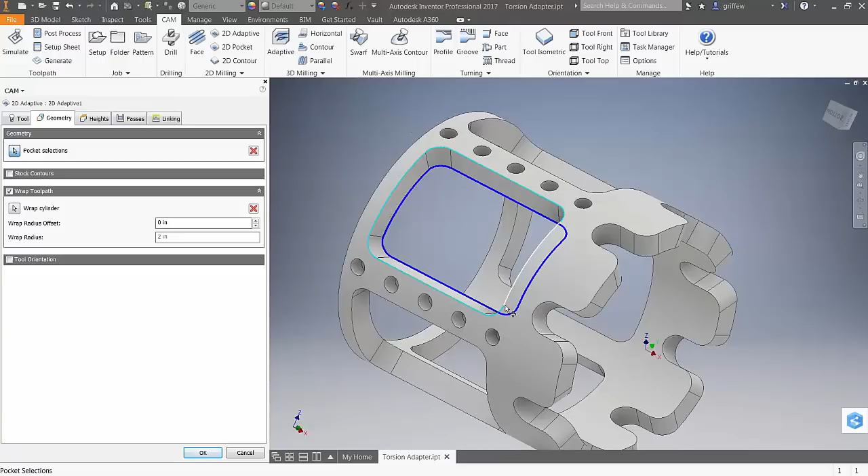Even with the heights, we can also put an offset so it drops down below. But again, as Al had mentioned, you've got to make sure that your geometry is exactly the way it would be as the tool would come in to cut that. So you can add an offset, and you can do everything you can with the 2D adaptive, but it's going to wrap it around that geometry.

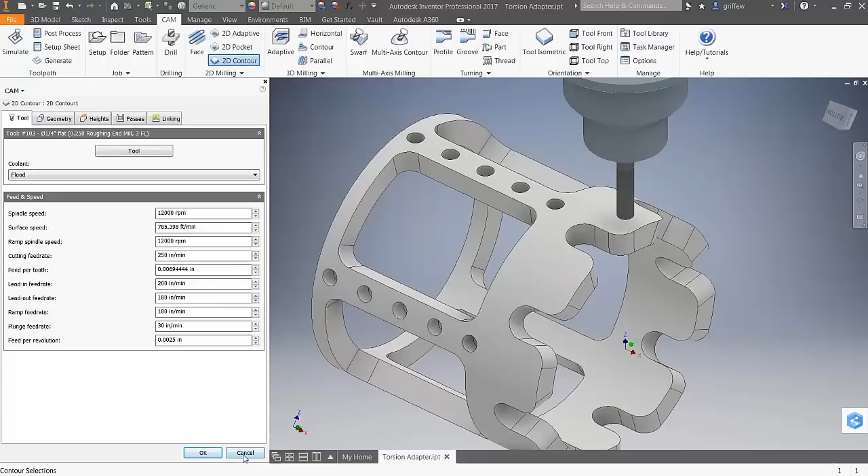All right, and we have also the 2D contour, and I want to show you the 2D contour on this part. Actually, before we do that, I'm going to jump in and do this for the 2D contour, but I want to show you another thing.

Somebody had asked earlier, okay, if I want that to go on all these different positions, we'd have to do another pattern. You don't—you can just simply drag it up into the pattern we did for the holes, and now it's going to be included in that same pattern. And now you'll be able to do the drills, then the holes, or the drill, tool change hole, or tool change pocket, and so forth.

But the same toolpath will work whether you're doing 2D pocket, 2D adaptive, or 2D contour to clean it up. You can just drag it into the pattern, and the pattern kicks in, and you'll be able to do that rotary axis work.

So the next thing I want to do is a contour, and I want to work my way around this outer edge with the contour. So I'm going to choose 2D contour. The same tool will work. In my geometry, I'm going to choose that wrap toolpath.

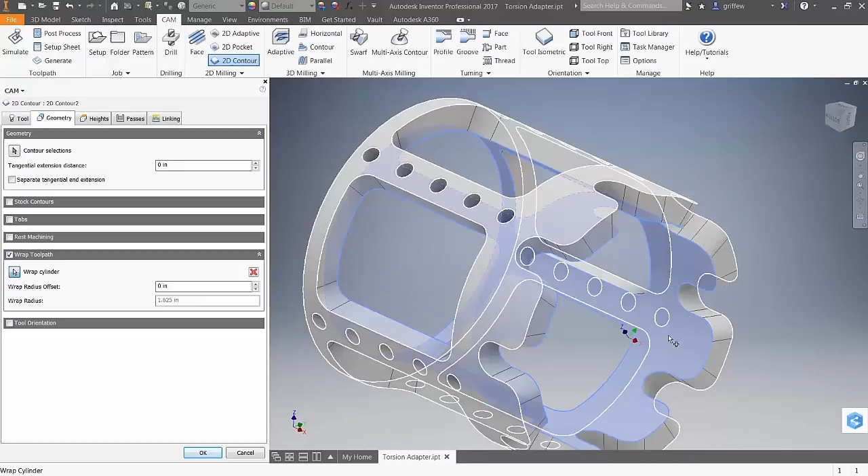For my wrap cylinder, we're going to do the inside. And then for my contour geometry, I'm going to select this edge right here. It selects that edge—I think the tool's going to start this way. So I want to make sure I add some tangential extension distance because of where I selected the geometry as well.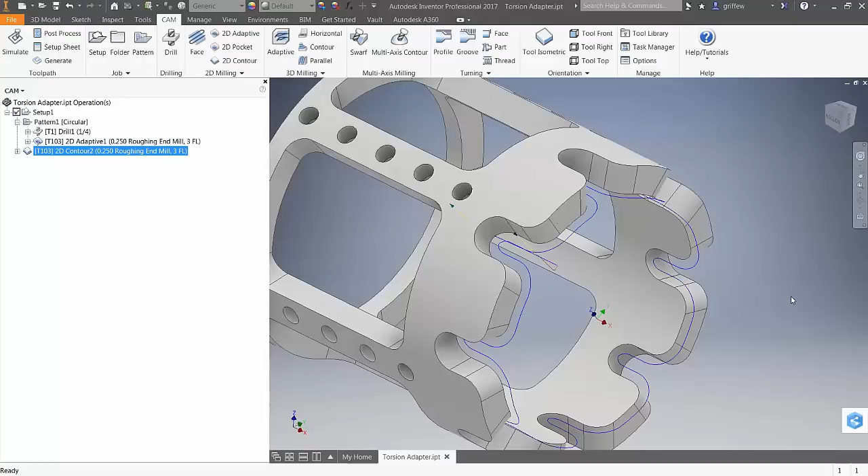Okay, so let's say we add a half inch into there. I'm going to leave it like that—I think we should be okay. I'm going to say okay, and we're going to contour that wraps around the front. I think I want to do that tangential different on the other side—you see how it's going in?

So actually, Al, it's a good question while you're here. If I edit this, I'm going to go into my geometry—I'm going to leave this at zero. Is there a good way for me to change where I want that to start? Could I start it at this corner and ramp in here?

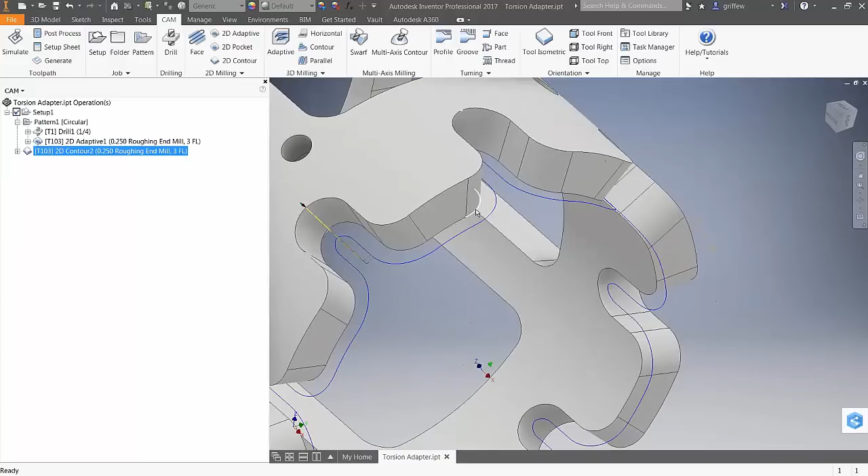The best way is to use the entry point on the linking tab—there's an entry point definition. To be honest, it's a live question; I'm not sure how well it's going to influence the 4-axis. Maybe I'll describe what entry point does at this point, though.

Many people don't understand—there's 2 options there, pre-drill location and entry position. Pre-drill location is going to say there's a hole here; the toolpath has to start at the point I selected.

Entry point is simply guidance. Start as close to this point as you can, so it does or does not need to be along your chain. It's simply saying, hey, I want to start close to here. I want to start looking at the front of my part. I want the toolpath to be on the front side of the part. You can select any geometry, it does or does not need to be on the chain you're machining.

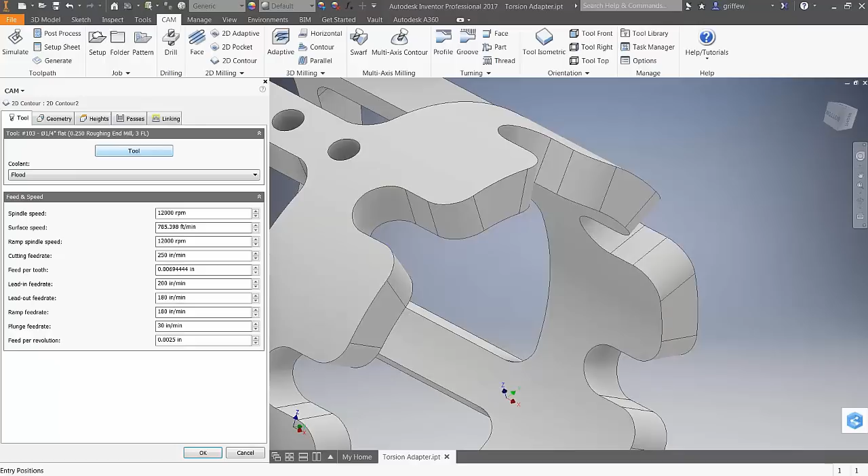Let's see how well it affects the wrap toolpath, though. Yes, it's around the corner a little bit. Probably going to need some more work on that, but that's the way you would do it. Thank you, Al.

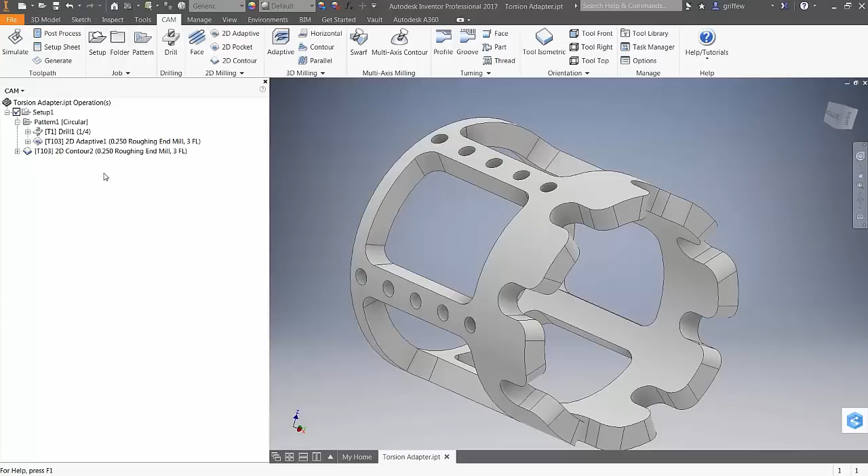While I'm unmuted, Curtis is asking about where it is in HSM Works. There's a couple questions in regards to HSM Works. It will be part of the first paid tier of HSM Works. It's not there now. We're targeting our April release. I got to be careful giving dates, but we're trying to have it done in the April timeframe to get this moved over to HSM Works. Awesome.

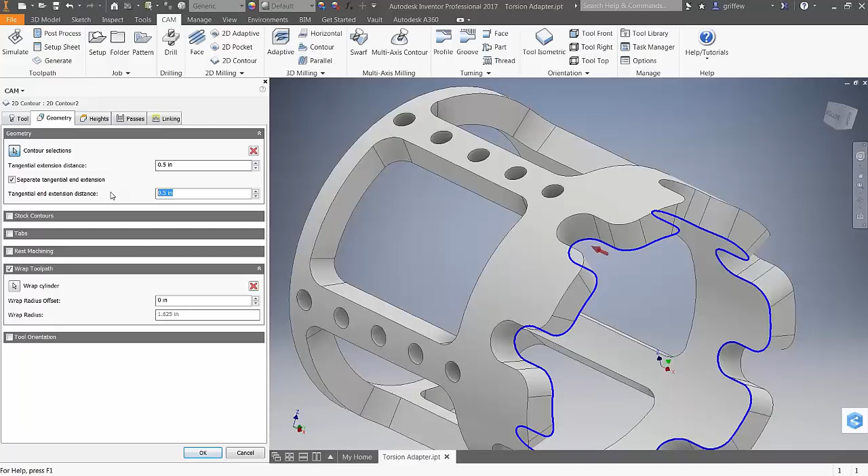Just a quick thing as I was looking at this earlier, one thing I was able to do, if it's helpful, I just added that extension distance and then a separate one, and I just left this at 0. So when it comes out of the material, it's in the center of the hole there. At least in this setup for this toolpath, it works well. So there's always a solution. You can always find a way to get the toolpath to work the way you want it to.

All right, so that's wrapping the contour. It's going around that wrap geometry we made. But when we post out the code...

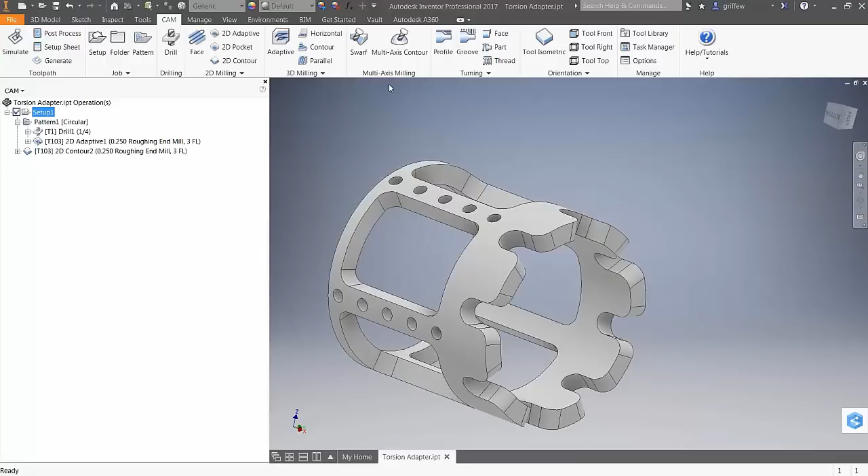So I'm posting with that A axis, and there's our drills. We got our pattern for our drills. Rotates around, and you see we get X, Z, and A axis rotation here. So that's using the Haas A-axis post, as Al had mentioned. There may be some edits needed for that to be able to work for you.

As he mentioned, our forums are a great place to go. If I bring up our forums, if you go to our main site, there's a link here, and I can show you the main site. Go to the link to our Inventor HSM and HSM Works CAM forum. We have our expert elites in here. They answer questions, they're very active on answering questions. There's a lot of information you can find if you search in here, especially working with rotary axis.

We have our Autodesk Knowledge Network, another great resource to go to. You'll find a plethora of information, links, places where you can find tutorials to work with. A really good resource to work with, the Autodesk Knowledge Network. And again, as I had mentioned, you can go to our main site. There's links in here, you can find a lot of information, especially when you're learning and you're new. Our Learning tab here will bring you to tutorials. We have our forum, you can click the link to our forum, which will bring you into that same page.

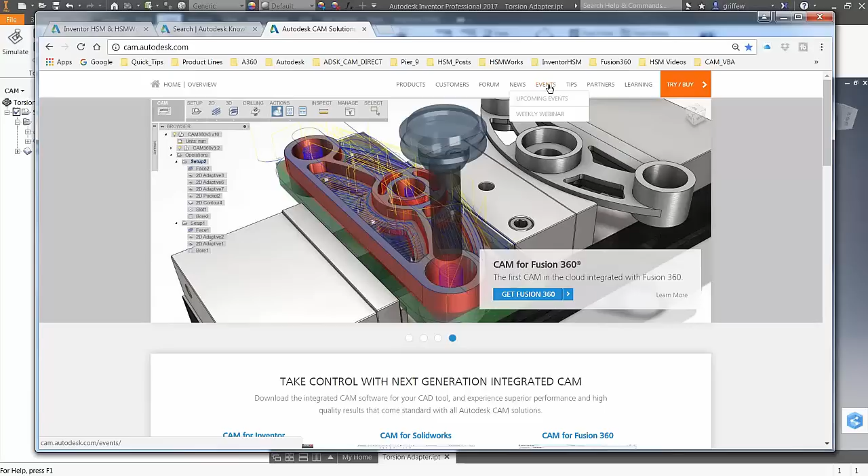Weekly webinars - we do have an upcoming webinar in 2 weeks. Carl Bass is going to walk through a couple of his projects that he used HSM on, and our team's going to be on live, and that's on the 20th. It'll be great to see some of the projects he works on in his shop.

Hey Wayne, quick question - who exactly is Carl Bass? Carl Bass is the CEO of Autodesk. He is a maker. Oh, he's awesome. He loves the ArtCam. He loves working with machinery. He's got his own shop. I know Al and Tim on our team work with him a lot. He's got a lot of projects going, heavily involved in manufacturing and in CAM.

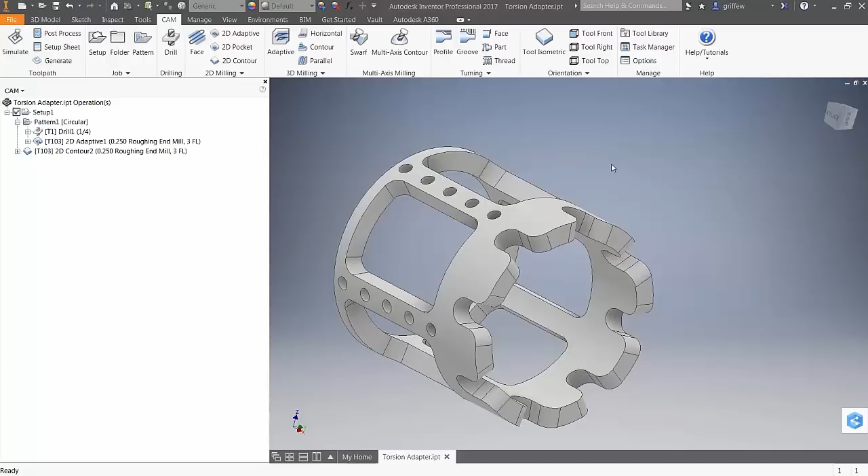Hey Wayne, if you're done showing your screen, I know this is sort of off script, but I'm continuing to see a couple questions about this concept I mentioned of the wrap cylinder. So I created a quick parametric sketch to show it. Oh, perfect, yeah, if everybody's interested, we can go ahead and show my screen. You're seeing my screen? Oh, I can see it, Al. Looks great. Okay.

So I drew a quick sketch of a part here. It's sort of a typical view of a 4-axis part. What I'm showing is the geometry on the side, so that would be parallel to the tool.

I've modeled the way most wrap features work in CAD, where that edge is going through the center of the part. And that sounds like it'd be the right thing to do. It's most often how it's modeled, but the reality is you then have a tool coming over to cut that edge, and the center of that tool is also going through the center of the part. That's by definition the only thing you can do, because you've only got the 4-axis to rotate, not 5.

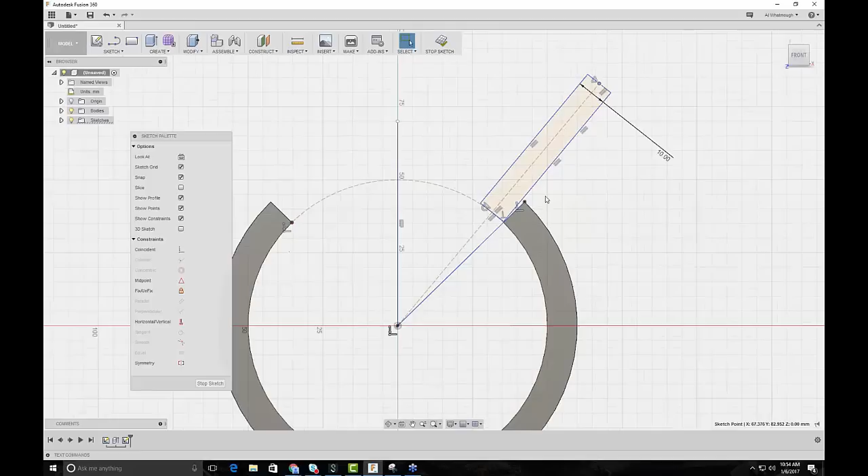So what that leaves you with is this triangular sliver of material that's a result of this offset from the radius of the cutter. Hopefully that's making sense. So we're seeing the cutter kind of coming around, but it's not able to machine that full part. So what the wrap cylinder is doing is saying that edge I selected, whether it's the bottom or top edge, is where the cutter is going to perfectly follow the geometry.

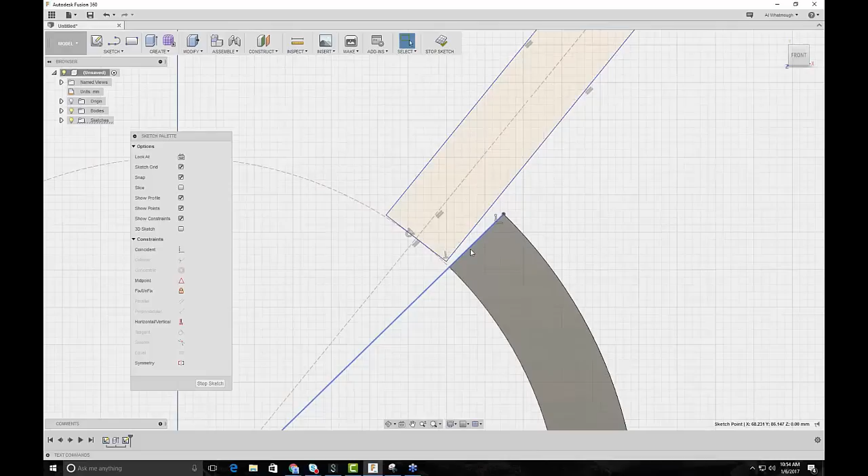So if you select the top, it's going to perfectly follow at the top and gouge the part. If you select the bottom, it's going to perfectly follow at the bottom and leave material at the top. Or you can use that offset and find some balance somewhere in the middle where it's gouging a bit at the bottom and leaving a bit of material at the top.

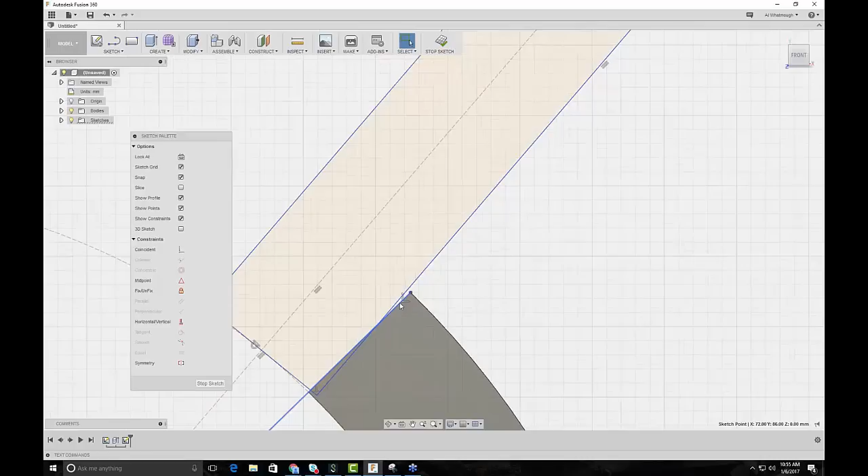Of course, the other option is to become a CAD wizard. I mentioned at the beginning of the webinar, you can't really be a CAM person without knowing how to strong-arm the CAD system to get what you want. So obviously the other option would be to model the part exactly how it's supposed to be, but we gave some functionality in the CAM environment to find the compromise that works best for your part.

Hopefully this little demonstration shows what the issue is. It incidentally highlights the issue of using a swarf toolpath and locking it to 4-axis. That's kind of the same reason it starts to fall down and give you some weird noise.

All right, I will go ahead and we can switch back to you, Wayne, but looks like some people found that very helpful. I think it's great for clarity.